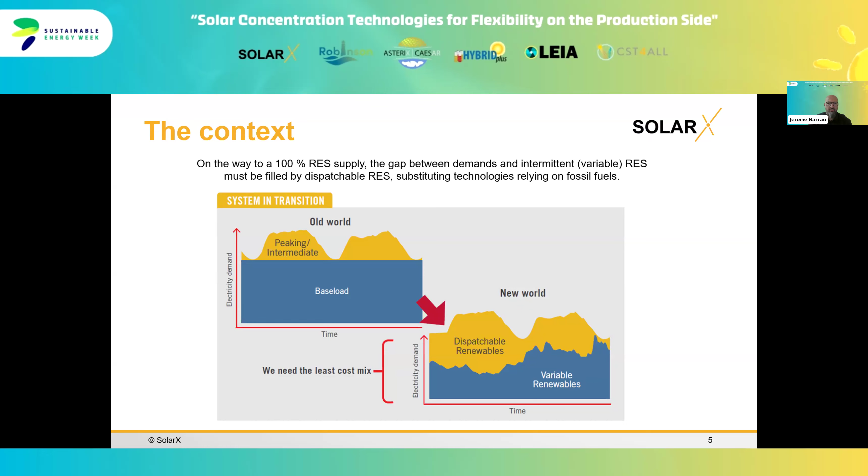Some other insights from the last months and weeks let us detect these tendencies. We need more flexibility also to fight some additional problems of the energy system right now.

One is price cannibalization. We know, for example, in Spain and in many countries, when there's sun, the price drops down very quickly, and so we reach a high number of hours with zero prices or negative prices for electricity.

So really, this number of hours with negative prices is increasing very fast, and that's a problem for the economic reliability of renewable energy systems.

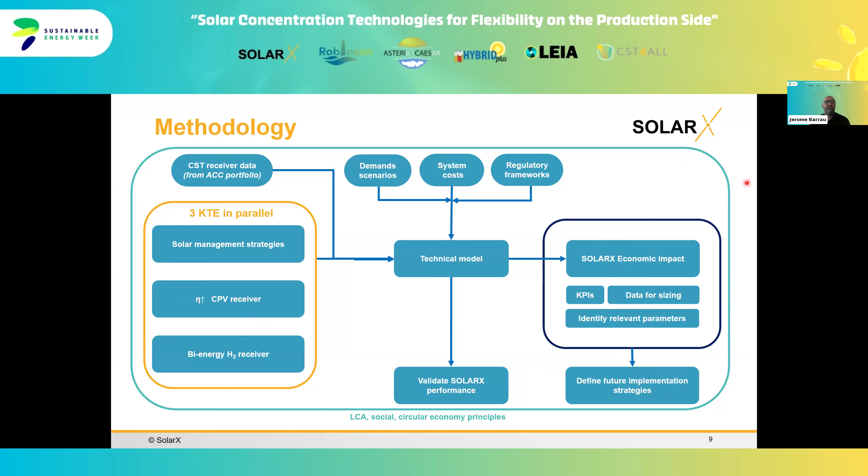So to resume the aim and objective: we want to integrate and make a synergetic management in a single facility of a system that produces heat, electricity, and hydrogen with high efficiency, depending on demand and price. We want to demonstrate the dispatchability and flexibility of this system and how it impacts the maximization of owner benefits - important to make it attractive for investors - and also how we can provide ancillary services to help stabilize the grid.

So make a solution attractive for investors, grid operators, industries, and citizens, being an agent of this green transition towards high RES penetration scenarios. As I said, different scenarios - I will not go into more detail, but just 3 types of applications.

This is important: general applications, so to feed the grids, the different grids for each of the energy vectors; also an industry application, where what we want is to match the demands of a given industry; and islands, where the main objective is to decarbonize the island.

So these are the 3 cases we are studying with different locations in Europe, and we compare with different technologies as a function of the type of application, with different KPIs - LCOE, of course, internal rate of return, but also COVE. COVE is the cost of valued energy, and this is a very important factor for flexible and dispatchable systems, as it takes into account the price of selling each of the energy vectors at any time.

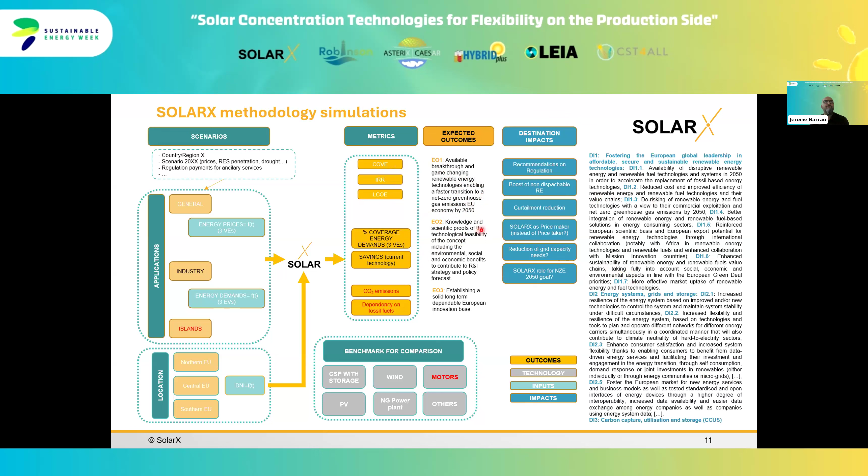Okay, so taking into account the variation of prices of energy vectors that we produce. Okay, just to move forward - some examples.

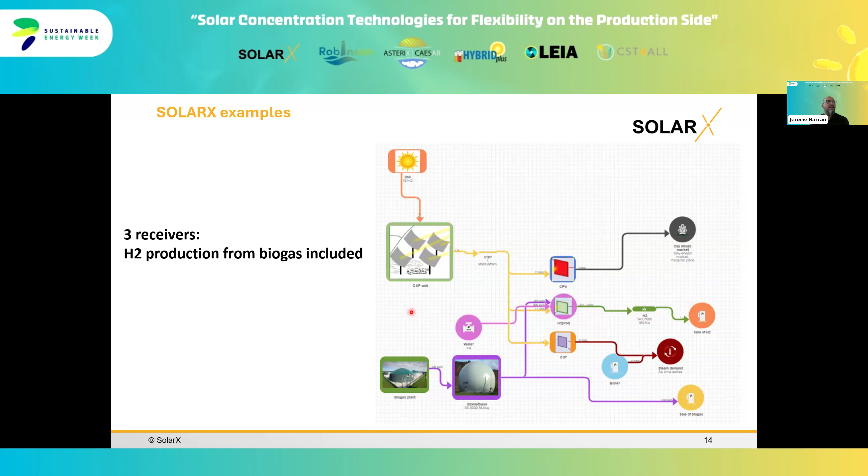I don't have a lot of time now, so very quickly - we have already validated the model for the three receivers with different inputs for the hydrogen receivers, in this case with biogas and water, to produce hydrogen. Another application we think is very important, apart from islands, that we haven't already implemented, is for industry application.

In this case, it's only CPV and CST receivers, but this is not to feed electricity into the grid - this is to match energy demands from an industry that we have here nearby Lleida.

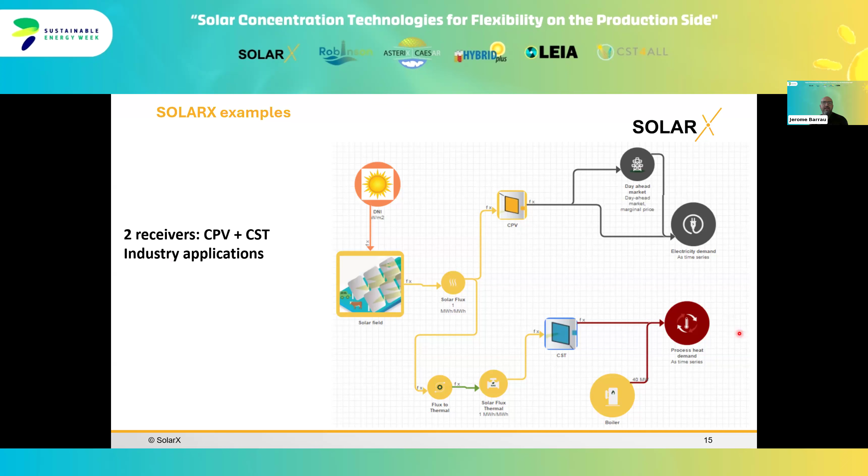So just to finish, as a conclusion: flexibility is a must right now. We saw it in the last weeks in Spain. Flexibility on the production side needs to be further explored. There are a lot of publications on flexibility on the demand side, some changes in regulation in some countries relative to this flexibility on the demand side, but flexibility on the production side is also important to stabilize the grid and allow an increased share of renewable energy without a lot of curtailment and inefficiencies.

So this is important for the net zero emission goals, potentially increasing the non-flexible, intermittent renewable energy systems too. If we have systems that are able to provide this flexibility and dispatchability, we can also increase the number of systems that do not provide this kind of capacity. This can be important for grid stability and for the economic reliability of the system, as we are able to tailor the production of each of the energy vectors to the prices of these energy vectors in the market at each moment.

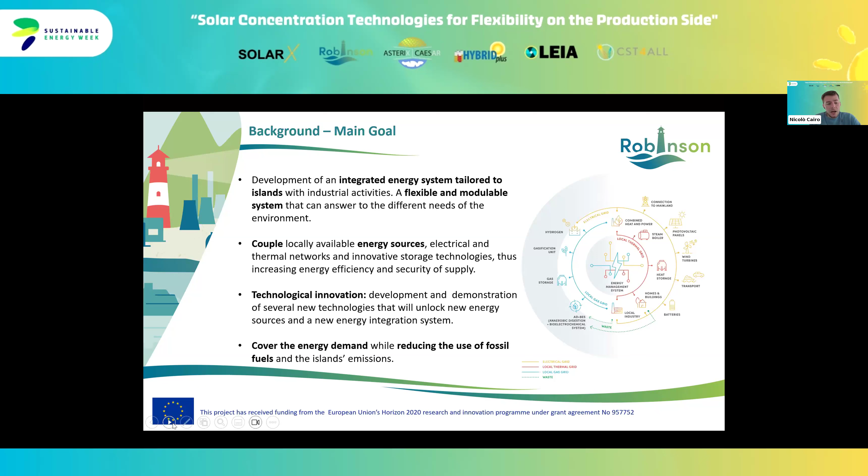In doing so, we couple available energy sources, like those available locally, in order to increase energy efficiency, security of supply, and reduce greenhouse gas emissions, so as to meet the requirements of the energy trilemma and also reduce the use of fossil fuels, especially in industrial applications.

What you see here is the plan concept of Robinson. In a nutshell, the PVs are an essential part of the system itself, originally foreseen to play a key role in providing energy both for industry and for households.

However, what you see in the next slide are some changes within Robinson. Last year, we installed wind turbines and PVTs not in Egerøy in Norway, but respectively in Greece and in Germany, to demonstrate the capability and performance of the technologies themselves. Moreover, we did not install any gasification unit or district heating system in the demonstration plant in Egerøy, but as a very positive outcome for our project, we installed a large electrolyzer for the production of hydrogen.

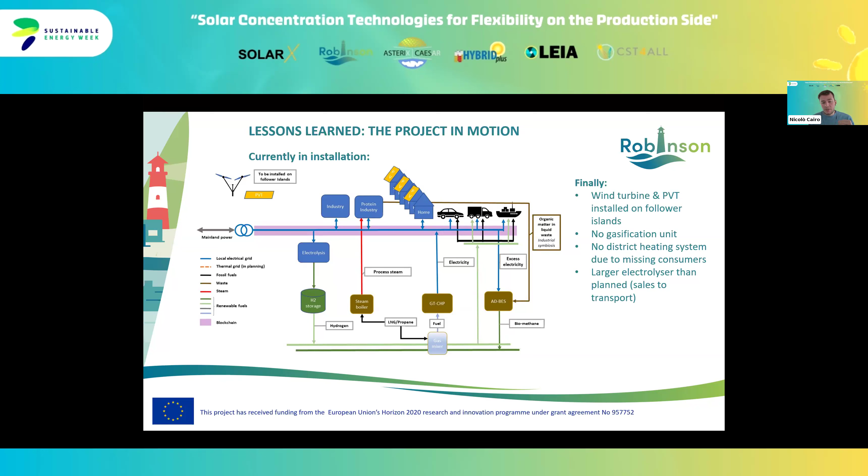As we are approaching the end of the project, we would like to share some key results with you. So how did we have this change in the planning of Robinson? Well, we could say two main reasons were the drivers for these changes.

On the one hand, we had public resistance, so we had politically driven decisions that prohibited the installation of wind turbines. There was not a consistent or solid social acceptance for the installation of this technology.

And moreover, we had a more important driver here, which was energy prices. This also prohibited the installation of the gasification unit. In a nutshell, our learning is that decarbonization is always driven by a business model, and if this is not solid enough, the original planning for decarbonization may be severely affected.

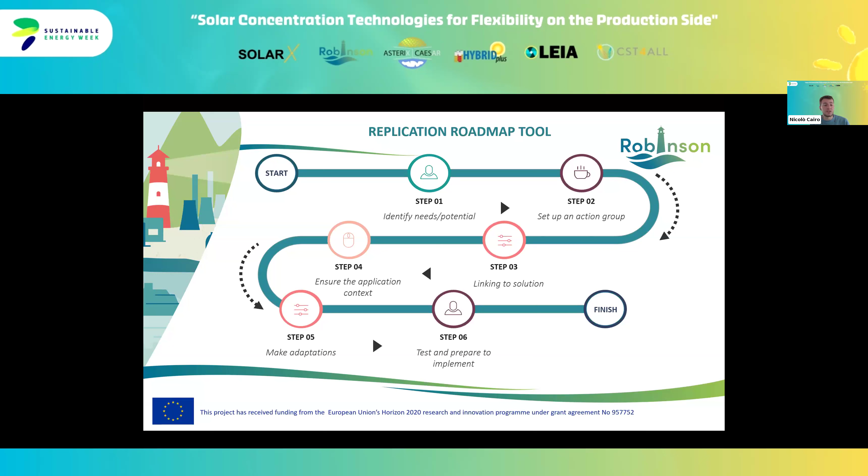So here was my last slide. And here you also find the Robinson website as well as the info@robinsonh2020.eu. So wherever you have any questions, please feel free to contact us and we'll revert back to you accordingly. Thank you very much.

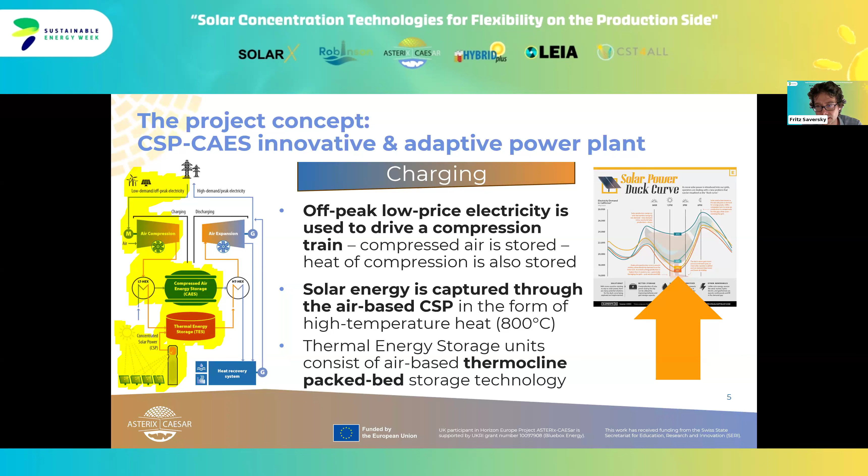And once the grid prices are high, during peak hours, we're going to discharge the system and take the compressed air. We're going to heat the compressed air with the stored heat from the CSP plant, and then we expand the hot compressed air in a gas expander and produce electricity.

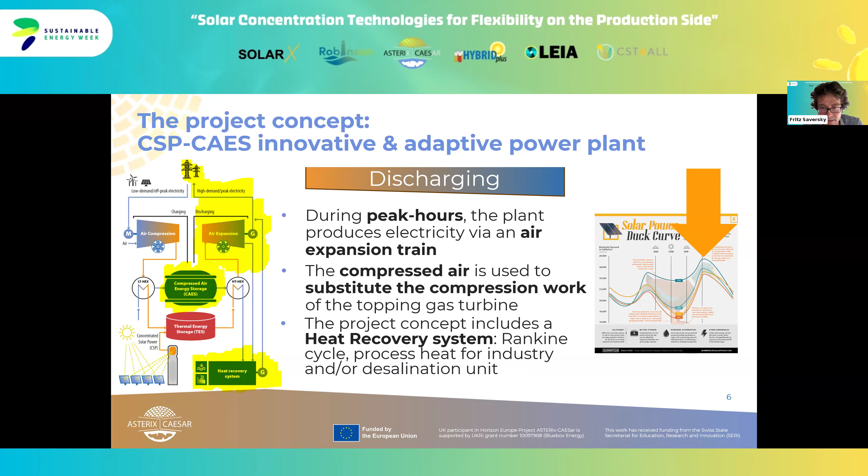And we also would like to recover the exhaust heat as much as possible, so we could either supply process heat to industry, or also implement the bottoming cycle to make best use of the low-value exhaust stream heat. And we could also use a bottoming cycle and process heat supply with a mix here.

So during the project, we are going to develop several key components. For example, for charging, we have the solar receiver, which is a volumetric solar receiver that heats air up to about 800 degrees Celsius. We're focusing on artificial intelligence-based flux control, and also developing new sensors to monitor flux. It's important to know what is actually happening at the receiver to best focus the heliostats.

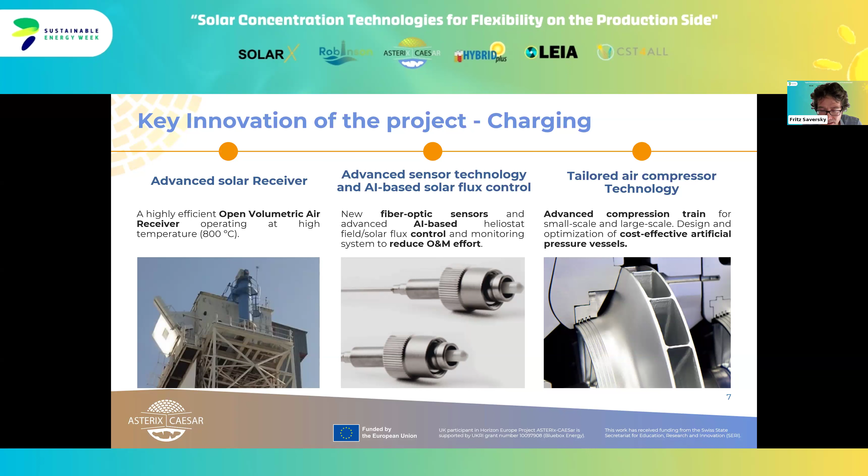And we're also having tailored compressor design, and we're going to optimize artificial pressure vessels to provide cost-effective storage of pressurized air in an artificial manner. And during discharging, we're focusing on optimized heat exchanger technology because we have air heat exchangers, and as you know, the heat transfer between air is challenging because we have a low heat transfer coefficient. So we need to optimize the heat transfer and the design to provide a cost-effective solution.

And we're also focusing on tailored air expanders, starting from 1 megawatt electric until about 150 megawatt, could always be larger, maybe until 200 megawatt electric. And we would also like to combine the system with automation in order to make best use of low value excess heat. And we would also like to combine the pressure storage with reverse osmosis desalination to provide some storage for the desalination plants. So this is all optimized and worked on in our project.

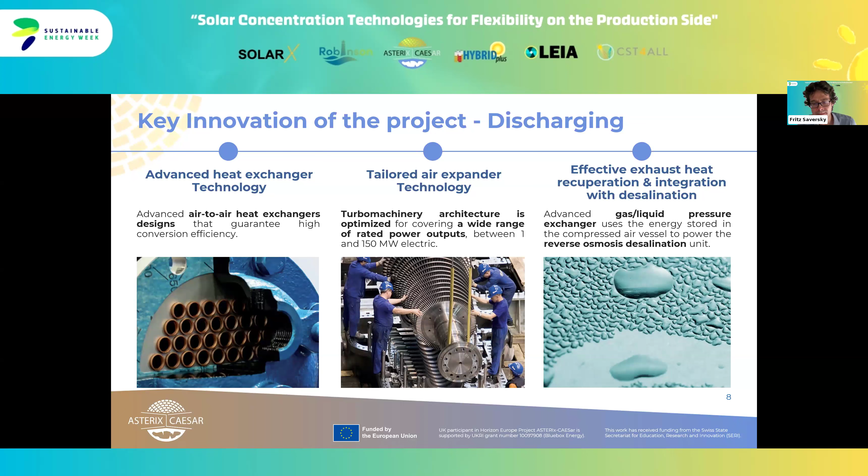And since project start, we have been focused on thermodynamic optimization of the plant concept, also techno-economic optimization, taking into account different grid boundary conditions, also different countries. Then we have been busy with solar receiver testing at small scale at the solar furnace at CIEMAT PSA in the south of Spain.

And we also have been busy with artificial intelligence-based tracking and control of heliostats and experiments of sensors.

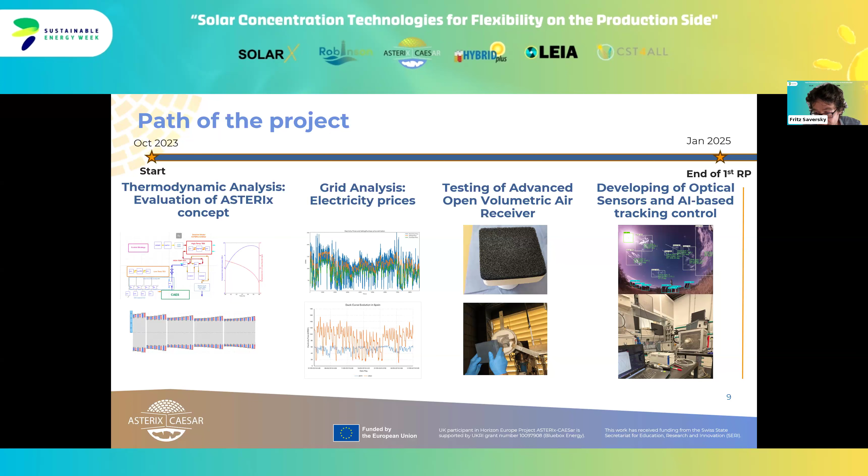And towards the end of the project, we are going to optimize the concept for different use cases around the world, because as you know, the CSP part needs high DNI, so we need to have a high solar resource. And as we propose the combination with compressed air energy storage, we also need to have underground caverns available in the same areas, or when we use artificial pressure vessels, we are not dependent on location, so we can just focus on solar resource.

And so we need to optimize the concept for different locations, and also take into account the electricity price boundary conditions worldwide. And in parallel, we're going to install a small-scale CAES-CSP prototype in the south of Spain, at CIEMAT PSA.

And there you can see on the right-hand side a more 3D view of the prototype. So you can see the solar receiver, which is going to heat the pressurized air stream in the heat exchanger, the red one you can see here. And then the hot pressurized air is going to expand in a small-scale gas expander and produce electricity. So we're going to demonstrate a small-scale CAES-CSP plant.

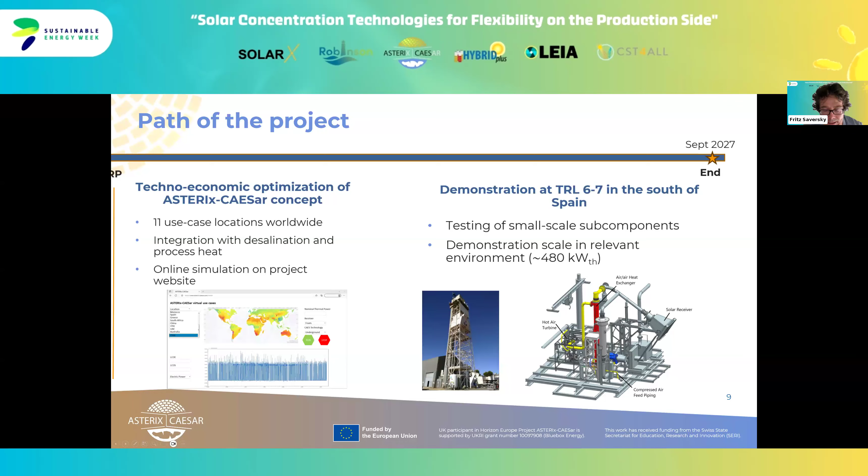Currently, we are busy with the work there for prototype integration. Okay, thank you, this was everything from my side. Do you have any questions?

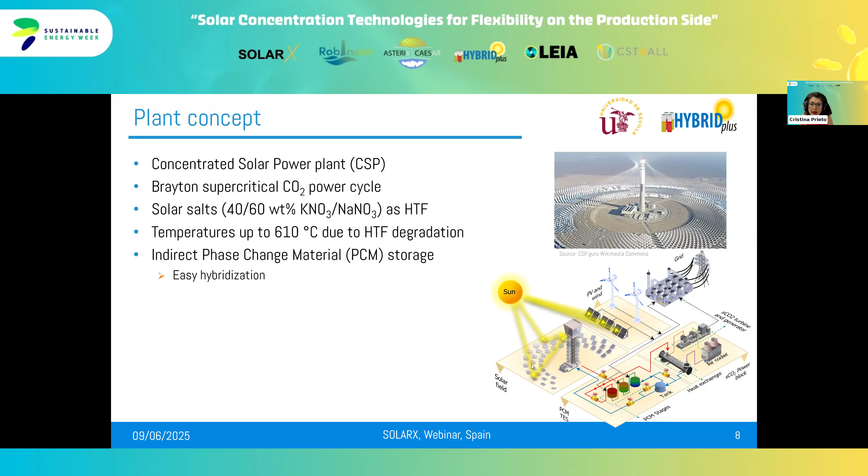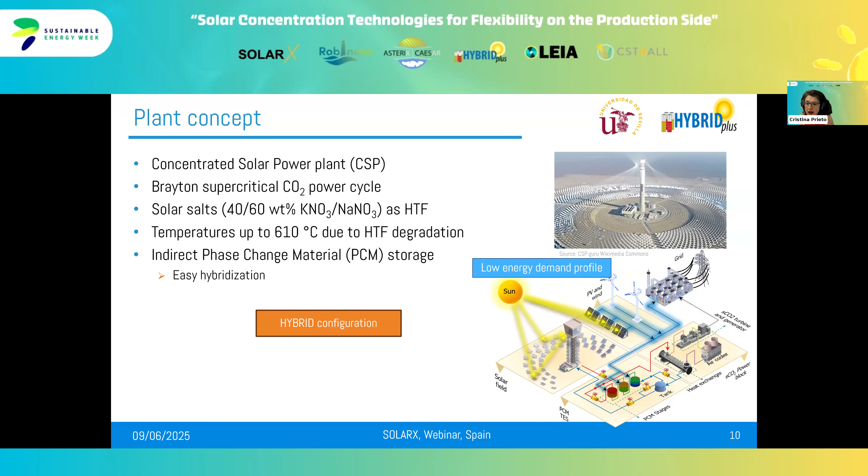The use of these phase change materials in this indirect configuration also allows hybridization of the storage system. We can charge this storage thermally with the solar field of the CSP plant, or we can charge by direct electrification of this storage system with energy produced by other renewable energies such as PV or wind, or with excess energy supplied by the grid.

So basically, the core objective of the Hybrid Plus project is to demonstrate an electrified thermal energy storage system based on phase change material arranged in a cascade configuration, designed for the next generation of hybrid CSP plants with advanced supercritical CO2 cycles. The cascade configuration addresses the issue of thermal hysteresis between charging and discharging when working with a sensible heat transfer fluid.

If we use multiple phase change materials with progressively increasing melting points, we can better match the variable temperature profile of the HTF during charge and discharge. That increases the round trip efficiency of this storage system and allows more effective energy utilization and easier integration into these supercritical CO2 cycles.

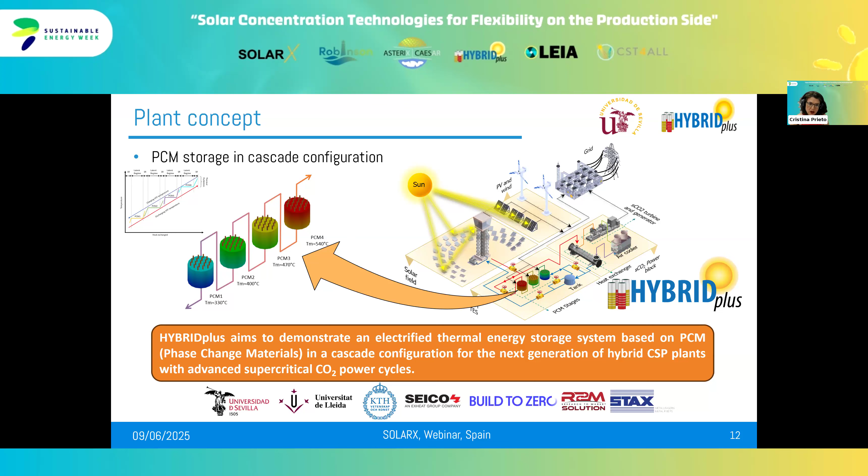As part of the Hybrid Plus project, we are developing and optimizing the design of this PCM storage module. This process includes the selection of suitable high-temperature PCM and the integration of a thermal conductivity enhancer, which are essential to ensure efficient heat transfer in the phase change material.

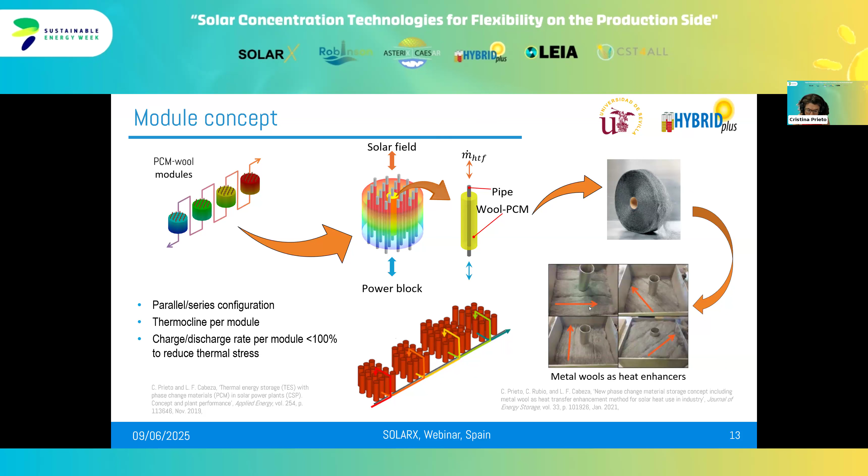To improve the overall thermal performance, we incorporate metal wools into the PCM matrix. With this configuration, the idea is to validate this module in a new pilot plant that is under construction.

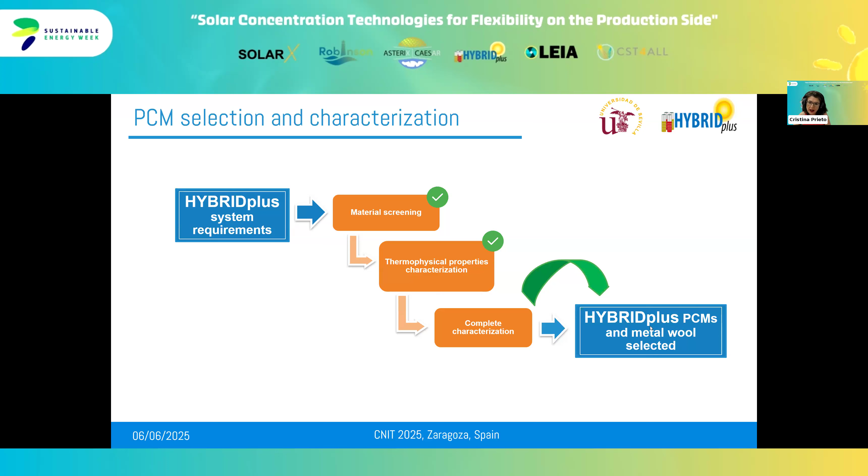So the first step in Hybrid Plus has been the selection and characterization of the phase change material for each stage of the cascade configuration. Starting from the system requirements, we conducted a material screening, followed by a thermophysical property characterization, and a complete characterization of the composite. The composite is formed by the mixture of the PCM with the metal wool selected as the composite storage material.

This selection and characterization of the PCM began with a comprehensive literature review that included commercial data sheets and numerically developed eutectic mixtures. Then we defined system requirements such as thermal property, compatibility, cost, and stability. Later we conducted a first screening, prioritizing KPIs like safety, environmental impact, and cost.

We also performed hygroscopic tests and preliminary corrosion assessments in order to select material for the pilot plant that we are installing at this moment in the University of Seville, and for the final concept for different applications: CSP application in power blocks, and CSP application for decarbonization industries.

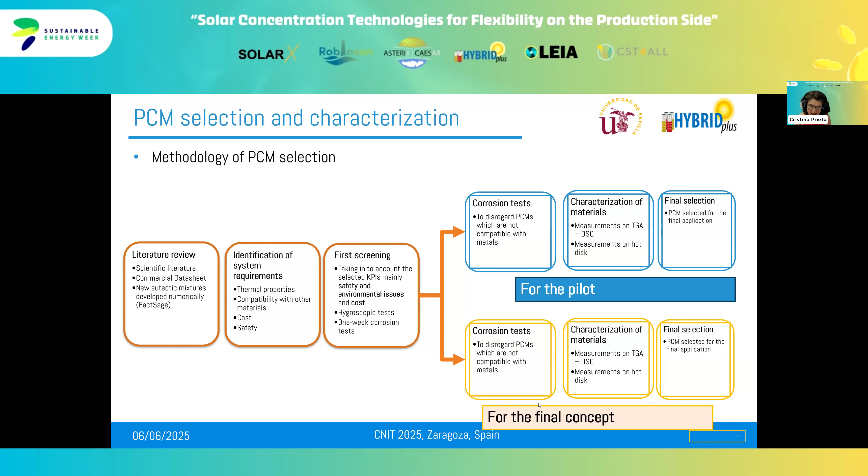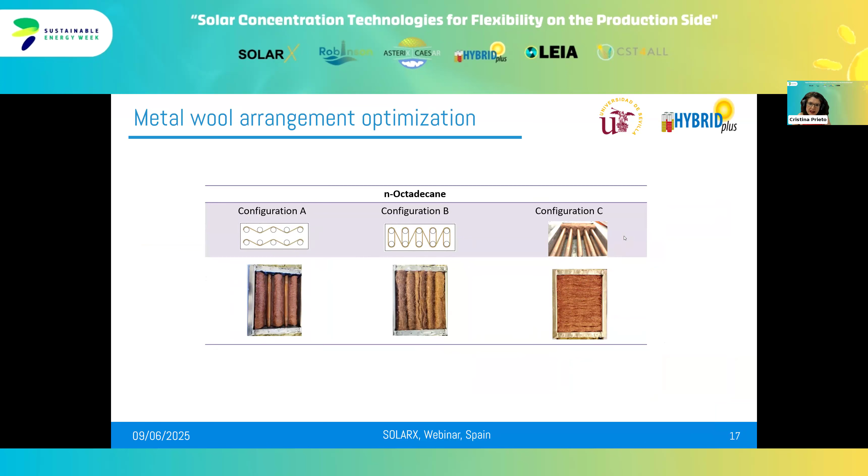In addition, we have explored different arrangements of the metal wools. We can see here different configurations: parallel tubes with wools packaged loosely around them, a more compact zigzag placement to increase surface contact, and a fully filled block with no defined tube spacing in order to maximize material density.

And with the mixture, we have characterized the effective conductivity of the composite. Here we can see how we prepare the material with the wool and with the salts used as heat transfer fluid.

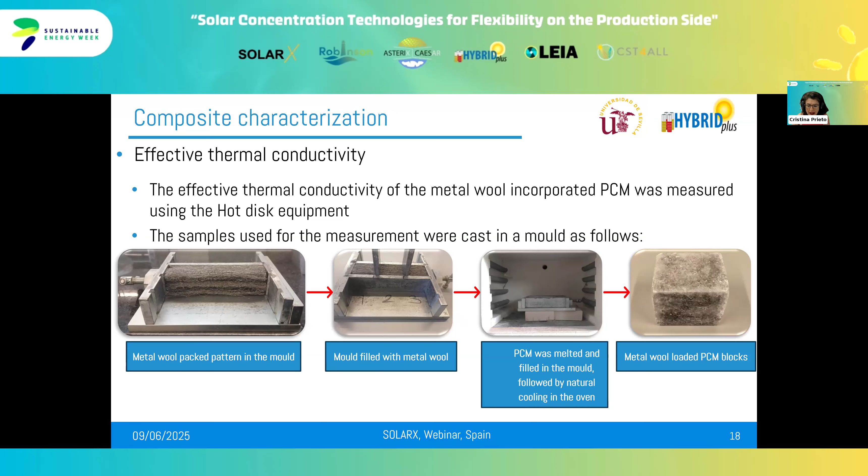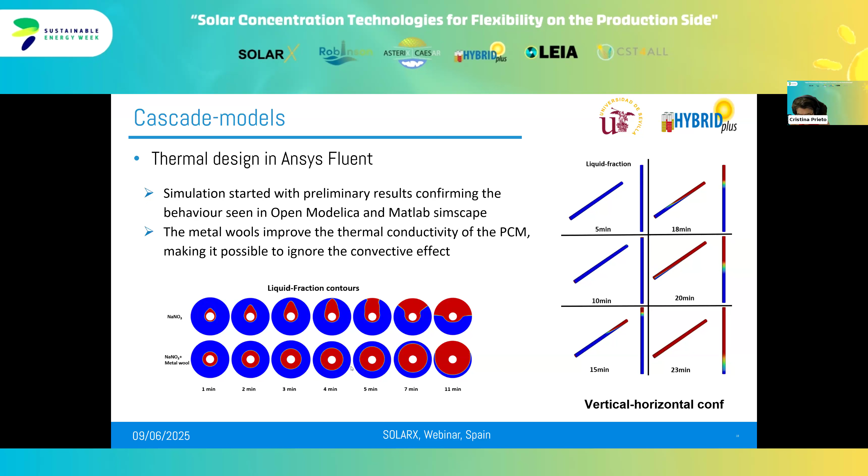We have measured this thermal conductivity with a special hot disk, and performed a thermal simulation using ANSYS Fluent to validate the performance of the PCM module arranged in the cascade configuration. The simulation results confirmed the behavior observed in earlier models developed by us in OpenModelica and MATLAB Simscape. The key outcome was that the inclusion of metal wool significantly improved the thermal conductivity of the storage system, and this enhancement reduced the role of natural convection in the liquid phase, but increased the overall conductivity in the solid phase.

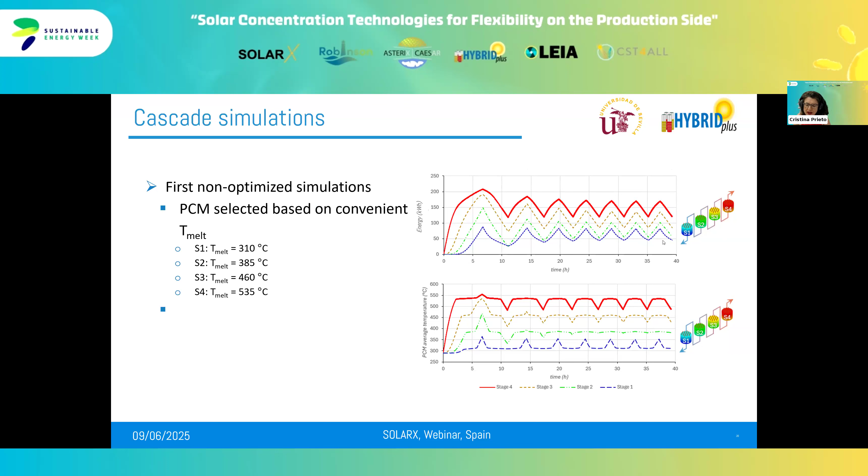Here we can see also some results of the cascade configuration, showing how we can reach stability after the first cycles in the cascade for charge and for discharge.

Finally, as I mentioned, we are going to validate this concept in a pilot plant. The pilot plant has been developed to replicate the main components of the technology. In a CSP plant, we have an energy source. In the hybrid configuration, these energy sources come from the sun and from the excess electricity coming from other renewable energies or from the grid. We will have an energy sink that could be a power block for power applications, or steam for decarbonization in the industry.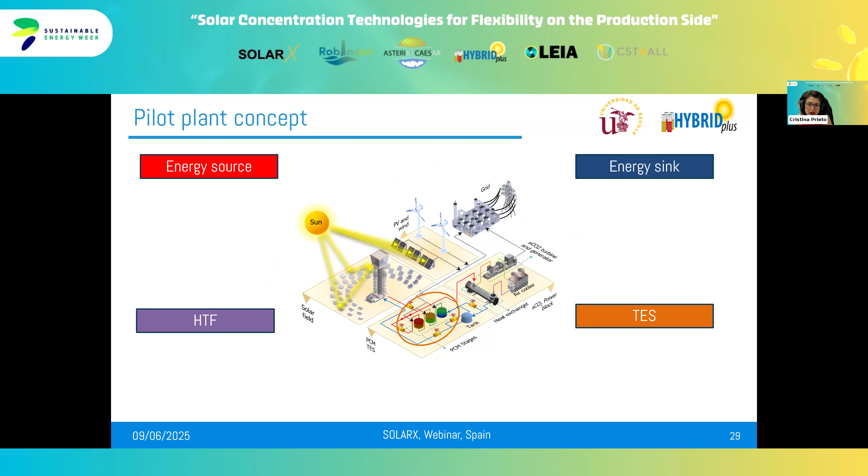We will have a heat transfer fluid, molten salt in that case, and the new thermal energy storage, the phase change material, in a cascade arrangement. The pilot plant that we have under construction at the University of Seville will replicate all these parts.

The energy source will be obtained with an electrical heater by Joule effect that can heat directly the HTF, with an immersion heater in the PCM modules in order to electrify the storage system directly. We are also developing an induction heater as a secondary energy source in our pilot plant.

The energy sink is an air cooler, tailor-made by us. The HTF will be the solar salt that we discussed at the beginning of this exploration, and the thermal energy storage will be the phase change material. We have the capability to validate a single configuration, just one module, or the cascade configuration with 2 modules representing any 2 steps of the cascade arrangement.

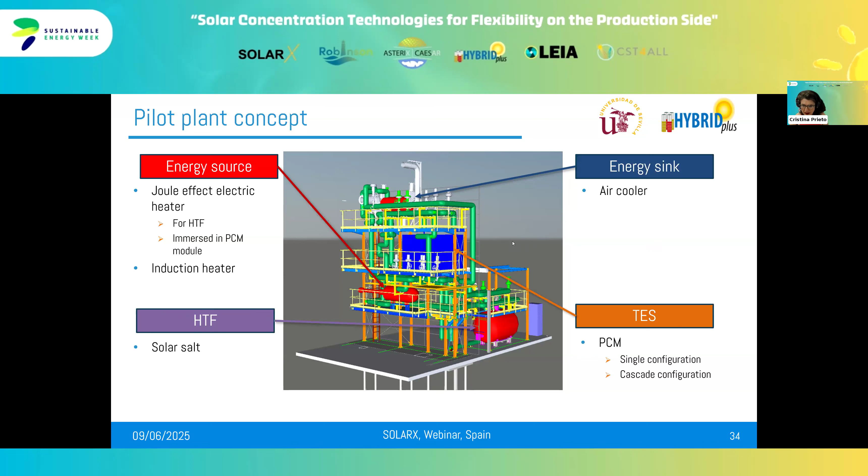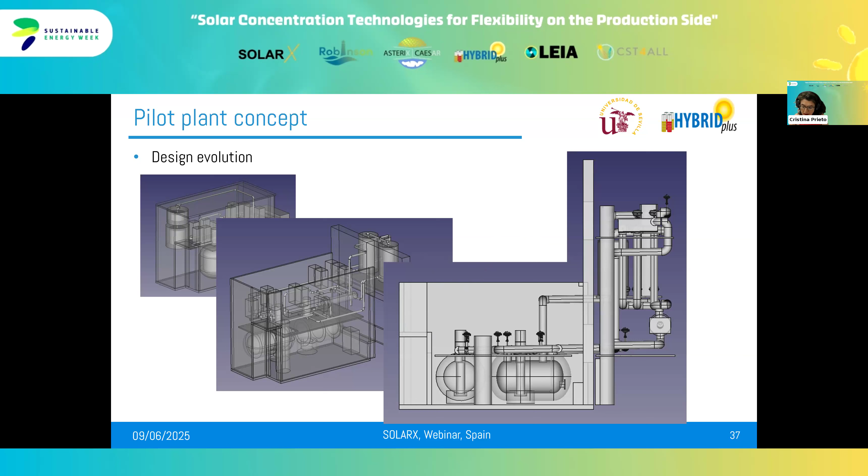Here we can see in more detail the design evolution we have had in the project. We have had several engineering iterations due to 2 key factors: the first was the space limitation we have at the university, and the second was the increasing cost of materials and equipment, taking into account that the original budget was estimated more than 4 years ago. Basically, this is the final design that we have in our plant.

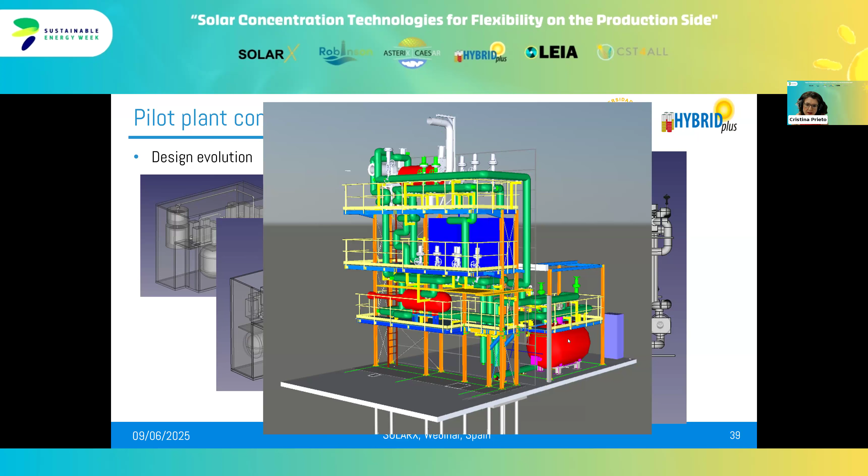Here we can see the electrical heater and the PCM modules, the molten salt tank, and the cooler. And if we want to see more detail of these components, this is the molten salt tank, with a capacity of 3 cubic meters.

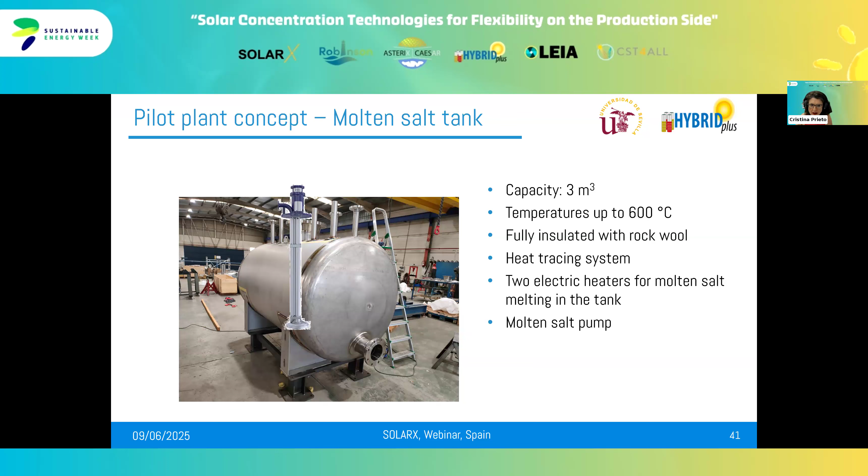We can reach up to 600 degrees, and we have 2 electrical heaters in order to cover the heat losses and also to produce a direct melting system inside the tank. We can also see the molten salt tank that will be installed inside, the inline electrical heater to heat the HTF in a shell and tube configuration, with the electrical sheaths in the tubes and the molten salt on the shell side.

The capacity of this electrical heater is 145 kilowatts of power, and again, we can reach up to 600 degrees with this equipment.

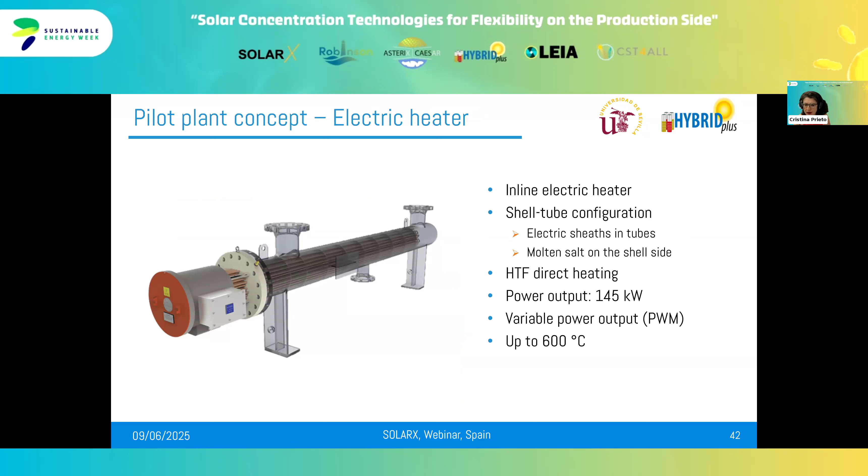Here we can see the PCM module that we will install in the pilot plant. The idea is to start the validation with the first phase change material, sodium nitrate. We will work with a melting temperature of about 310 degrees, and the molten salt will charge at 360 degrees and discharge at 290 degrees.

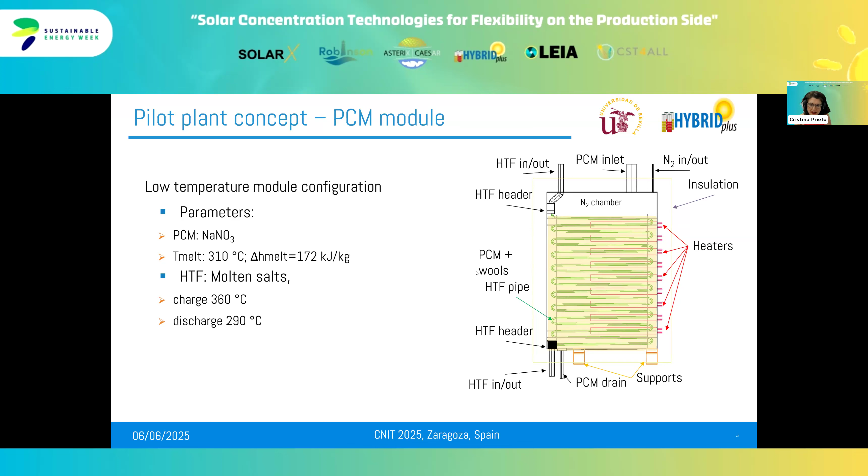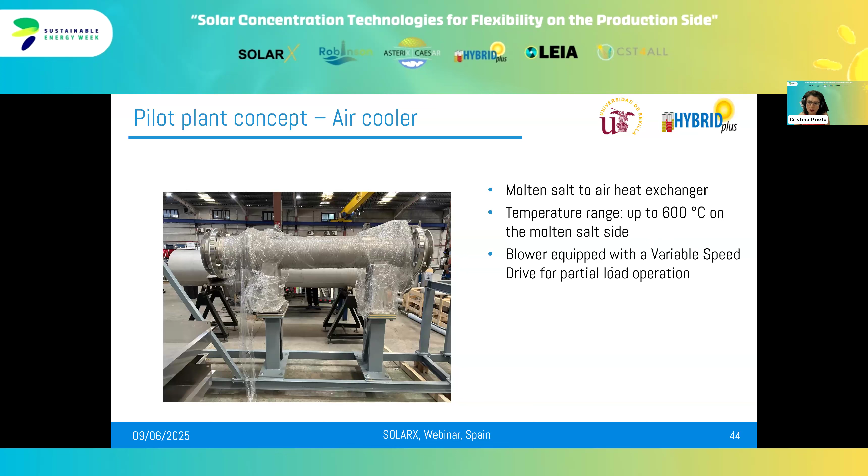This plant has been designed to be very flexible, to enhance safety. All systems are full drainage from design, with the tank able to accommodate the whole inventory of the HTF.

Different thermal energy storage configurations can be accommodated, from temperature range of 150 to 600 degrees. The modules can be replaced easily to validate different thermal energy storage configurations, different enhancing materials, and different heat exchanger and electrical heater configurations, different PCM configurations, including micro and macro encapsulated solutions.

The idea in the future is to validate this in a direct steam generation solution for process heat.

We can also validate different HTF. Originally we are going to work with solar salt, but we can also change this HTF for thermal salt. The plant is under construction at this moment and will be in operation at the end of this year.

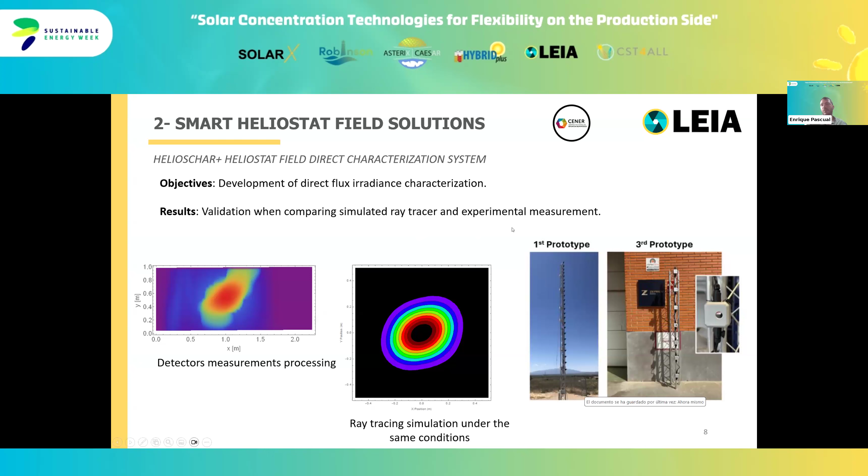With this tool, the idea is to better understand the flux and the reflective flux from the heliostat, also leveraging these two as part of the commissioning of a solar field, since there isn't intensive use of the camera target state-of-the-art method. Finally, let's move to the last tool for characterizing the solar field.

In this case, it's the automated soiling inspection. This tool is co-developed by DLR and CSP Services. Unlike the other tools that aim to gain deeper understanding of characterization and calibration of heliostats, this tool is focused on measuring the soiling as a proxy of the reflectance.

The idea is mounted on a drone, as you can see here on the reflected image, coupled with an RGB camera. After checking the reflectance of the mirror, it can extract or predict the soiling loss compared to the reference samples.

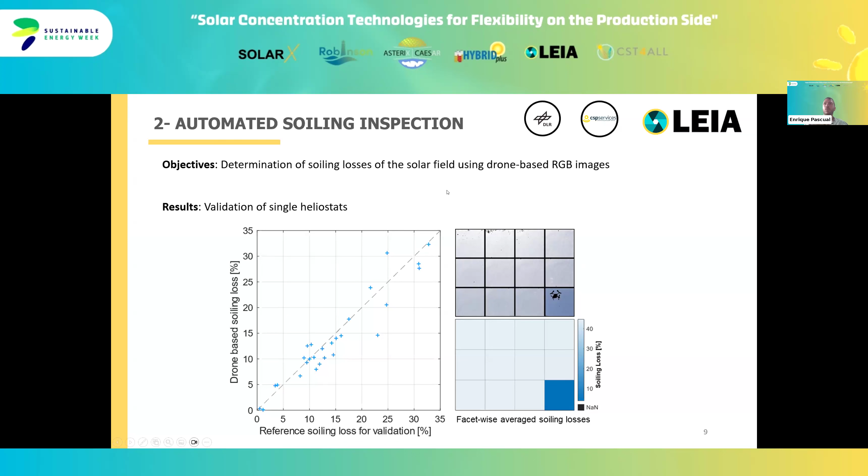So when we look at soiling compared with the measured data, it shows very good agreement between the predicted and the measured values. So this tool is currently validated at the PSA, and the idea is in the next month to move and validate this tool in the Gemasolar plant.

Now let's move to the receiver control solution. First we have QFlux, a contactless quantitative flux density measurement, developed by both DLR and CSP Services. This system consists of a set of cameras installed on the solar field, similar to infrared cameras, pointing at the receiver. After an initial calibration of the receiver during the night, then during daylight operation, these cameras quantitatively measure the incident irradiance on the receiver.

After this post-processing, this tool will serve as a good complement to infrared maps of the receiver, due to the fact that the flux changes more rapidly than the temperature that these infrared cameras are measuring. So the idea is to anticipate any potential problem that might happen in the future, giving more robustness to this technology.

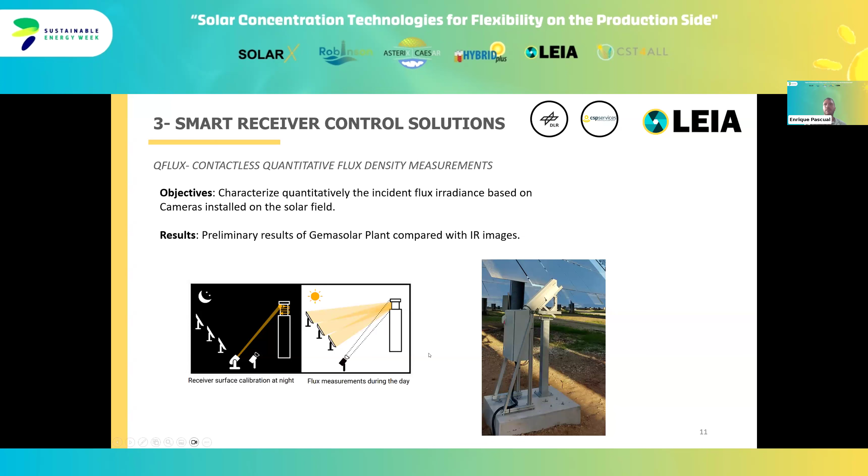Then we are developing another tool. This high irradiance hybrid measurement is developed by the PSA from CIEMAT, and this system consists of a direct irradiance measurement. This device, as you can see in the picture, is located in an area close to the main receiver, and the idea is to leverage the spillage of flux out of the receiver in order to use this information for calibration and visual inspection. So this kind of radiometer will serve as a reference for future estimation of the flux.

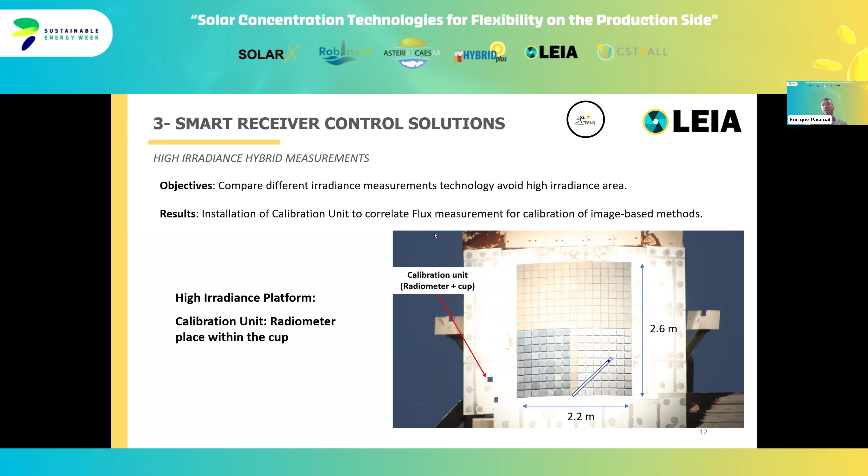And finally, the last tool of the receiver characterization is the power on-off method. This is a very well-established method. The idea of this activity is redefined, led by DLR. As you might know, this experiment consists of a real experiment performed on a running CSP plant. It consists of alternating full solar field and 50% field pointed at the receiver, as highlighted here with blue squares representing 100%, and orange squares representing 50%. After shifting from 100% to 50%, the mass flow rate of molten salt has been tuned accordingly to avoid overheating or freezing, as the number of heliostats in focus changes. After this analysis, it will show how the receiver is behaving, how the thermal exchange performs in a real operation site, and eventually give us information about the efficiency of the plant.

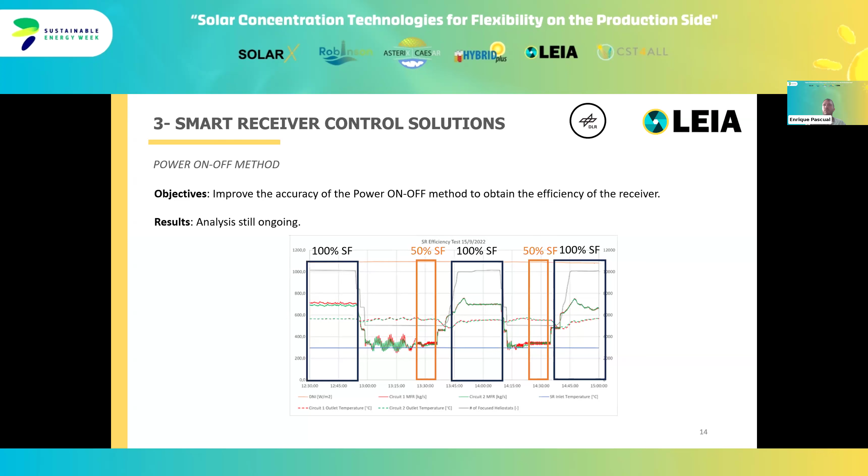Now let's move finally to the main two blocks. The idea of this energy management system, developed by Acciona, is to leverage all the information gathered from the previous sensors installed on both the solar field and the heliostat controls, in order to develop a tool that can predict what was going on in real time. To give you an overview, this energy management system will include the level of reflectance extracted by the drone through automatic drone inspection, the optical quality of heliostats extracted by the different tools explained before, and eventually it will provide this kind of solar flux distribution on the receiver.

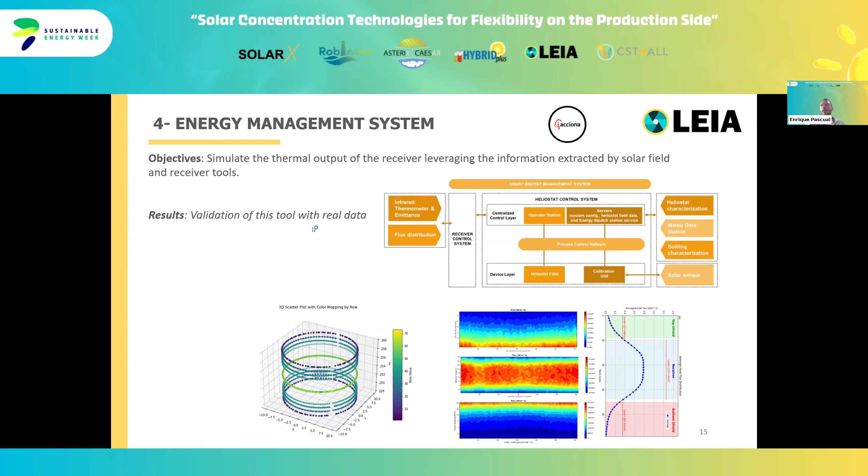This is specifically a simulation for Cerro Dominador. With these kinds of maps, we will compare with those flux and measurement distributions, and see what kind of difference might be coming from. So eventually we will compare.

And finally, I would like to conclude this talk.

The idea is to integrate each of the tools or each of the outputs of the tool into the DCS, the distributed control system of the plant. So simply to give you an overview, I will share with you the automated soiling inspection.

First, as mentioned, the drone flies over the solar field and extracts RGB images. After correlating and correcting these images, it can extract a calibration routine in order to have an estimated soiling or reflectance value of the solar field. Then by using the GPS positioning, it can be correlated with the heliostat ID in the solar field.

So essentially, after this processing, which represents the calibration and internal post-processing that this tool has, it will share with the DCS these heliostat maps in order to shed some light on the degree of soiliness of the solar plant.

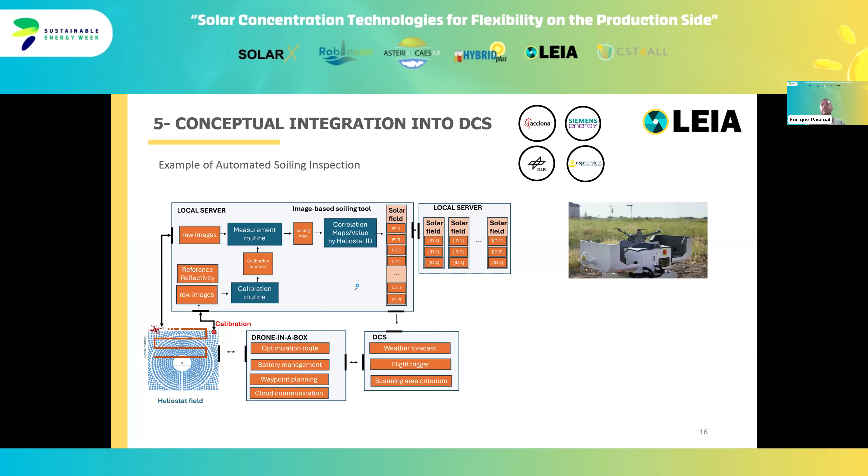Finally, to conclude, we have developed several solar field methodologies in order to calibrate optically the behavior of heliostats. Some soiling inspection tool has been developed and validated experimentally. Also, we have a set of different characterization methods to explore in real time the performance of the receiver. Combining this information, we have a preliminary simulation tool that combines all of this information and predicts the behavior.

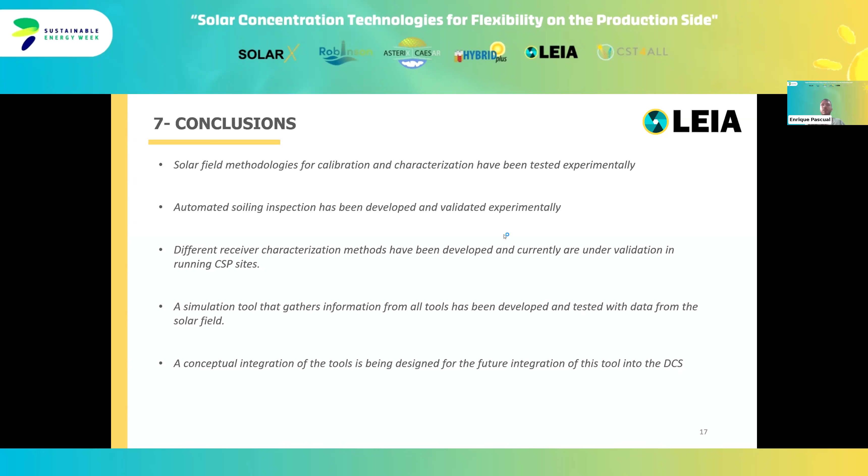Finally, I showed you the conceptual integration of these tools for the future integration of them into the DCS, also assisted by the knowledge of Siemens. So with that, I would like to thank you very much for your attention.